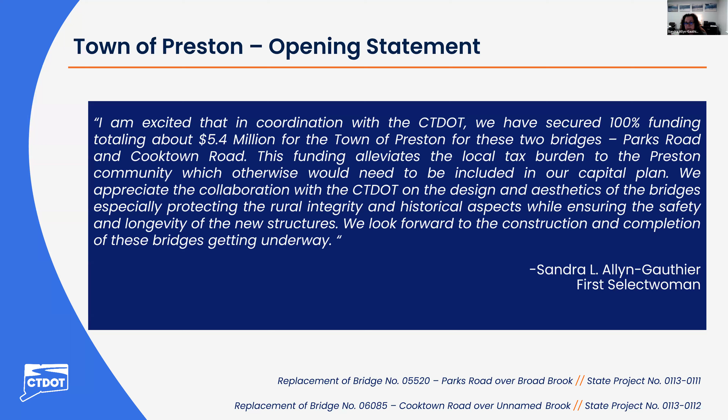Thanks, Sandra. I will now turn it over to John Carelli for the formal presentation. John? Thank you, and just thank you, Sandra, for the introduction.

Just to see if some of the town of Preston contacts, if you wanted to contact the town directly, we'll be showing multiple times throughout the presentation the different ways to contact the Connecticut Department of Transportation team for this project. So I'll get right into it.

The project purpose and need: the purpose of these projects, both 113-111 and 113-112, are to replace bridge numbers 5520 and 6085 due to their structural and functional deficiencies, in order to provide structures that are in a state of good repair and that are capable of meeting current load rating standards, as well as allow the existing clapper stone and stone masonry arch bridges beneath to remain in place.

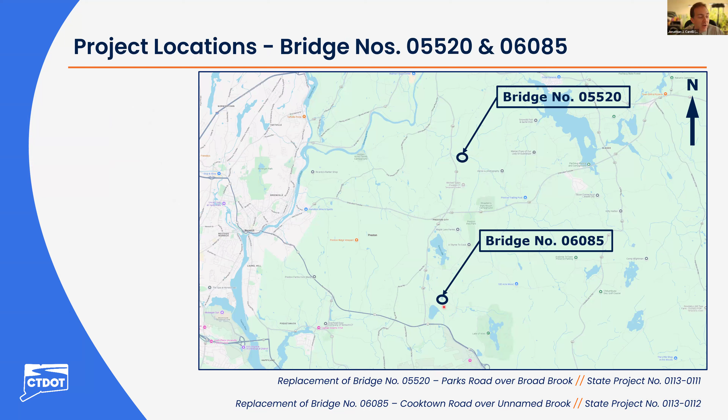Here's a slide just showing the relative location of the two bridges. Bridge 5520 is just off of Connecticut Route 164, north of the center of town, and Bridge 6085 is closer to Route 2 in the south of Preston.

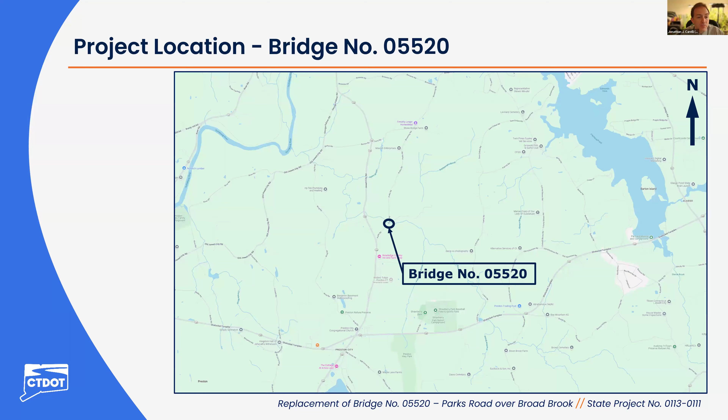Just a little bit closer view for 5520, again just right off of Connecticut Route 164. This is an aerial of the project site, as you know, on the north approach here. There's a slight horizontal curvature that joins at the bridge. Broad Brook, which it crosses, flows from the east to the west through the structure. There's one property with a driveway adjacent to the southwest corner of the bridge.

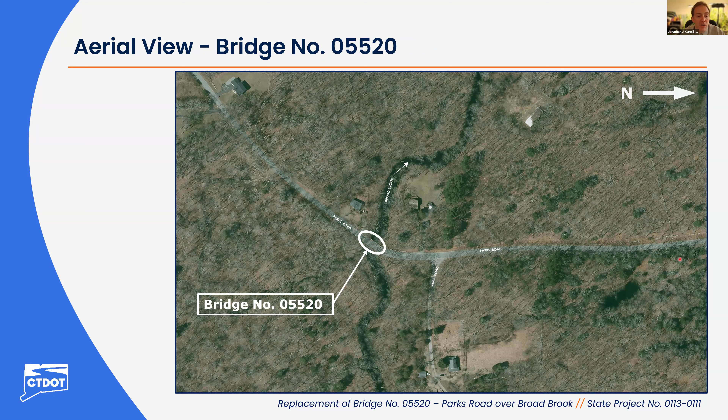Following are a couple photos showing Parks Road, again with the horizontal curvature approaching the bridge. And then here's the bridge from the north approach, again with the driveway in the southwest corner of the bridge.

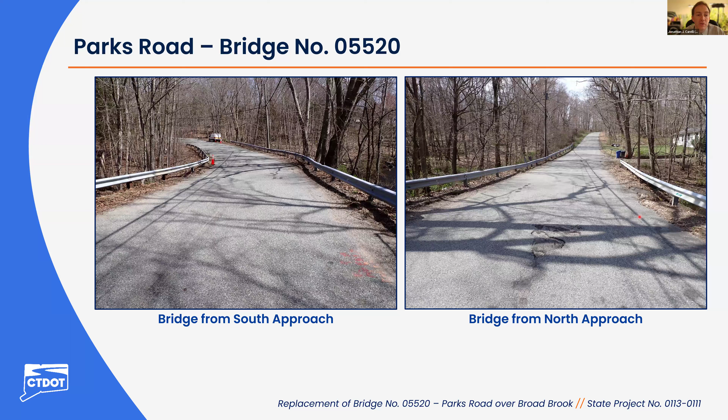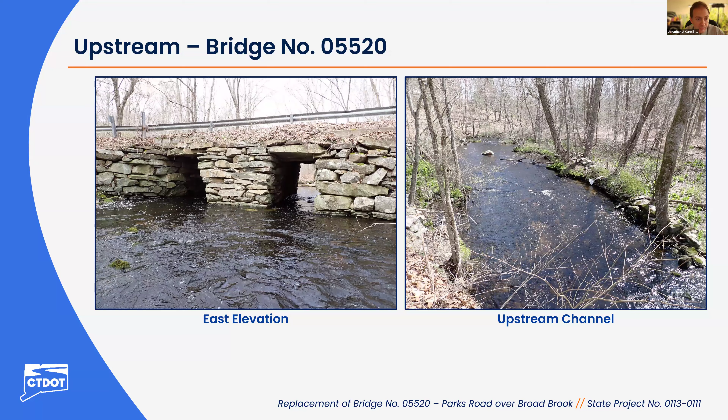Now looking at the upstream fascia, you can see the existing stone clapper bridge, the original construction of the bridge. This is the upstream channel, and it enters the structure at approximately a 45-degree angle. Downstream it exits more perpendicular to the roadway.

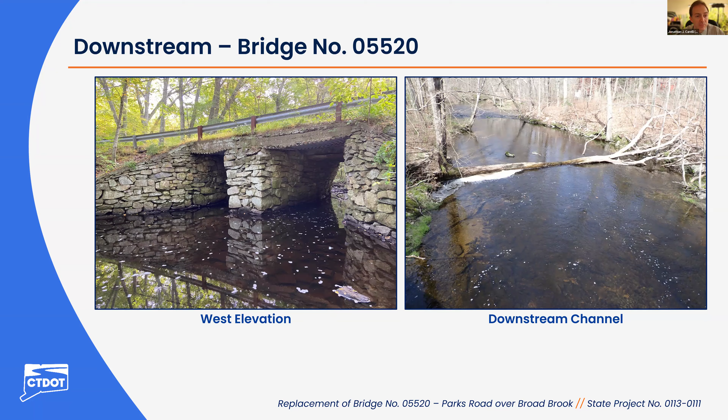Bridge 5520 was originally constructed in the year 1900, and approximately 1960 is when they added the reinforced concrete slabs. The structure is potentially eligible for the National Register of Historic Places, so that's an important aspect of what we recommend and what we're presenting here for a replacement at the site.

It currently carries a total travelway width of 21 feet with one lane of travel in each direction. A total of 148 vehicles use this crossing per day. The flow area beneath this crossing accommodates 12.1 square miles of drainage area.

The current structure is rated a 5 on a scale of 0 to 9, which in this case is fair. Some of the conditions involve heavy scale along the reinforced concrete slabs, cracks and voids throughout the stones. For the age of the structure, this is fairly normal. Loose filler stones as well—it's dry stack stone masonry, so there's naturally going to be voids between the stones.

There's slight bulging within the existing wing walls, minor scour below the water line throughout the bridge, and on the approaches, disconnected post, bent post along the roadway and for the guide rail.

The orange represents the new structure, so it would be both longer and wider than the existing just to meet standards. It's going to be longer than the existing bridge in order to set back the foundation away from any of the stone masonry that's there currently, to preserve it, and also to provide that wider structure which we need.

Again, the goal is to provide a structure that allows the existing clapper stone masonry bridge to stay in place.

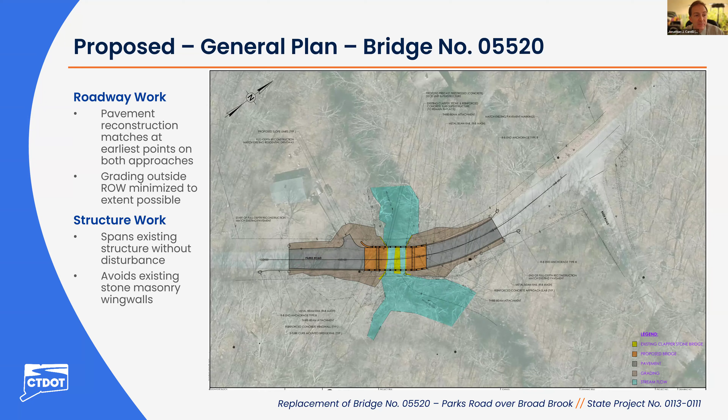We're going to have what's called reinforced concrete integral abutments, so they essentially work as one large structural unit over top of the existing structure, completely independent of what's there currently. We'll be using drilled micropiles instead of standard steel piles to minimize vibrations and again to preserve the existing structure.

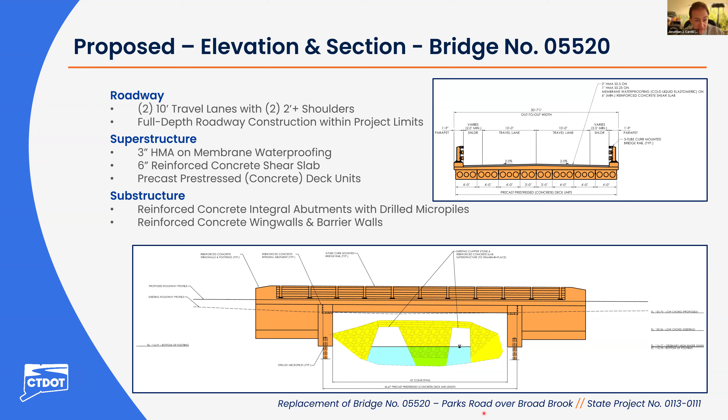I mentioned that we're going to be raising the roadway profile to accomplish this. Currently the bridge itself is actually in a low point or sag point, which is not a good condition for both drainage and the long-term preservation of the structure. For this, we're proposing again to raise and build over the existing structure, which will also allow us to move the low point off the bridge to provide better drainage away from the structure, for the long-term survivability of both the new proposed structure and the existing clapper stone bridge.

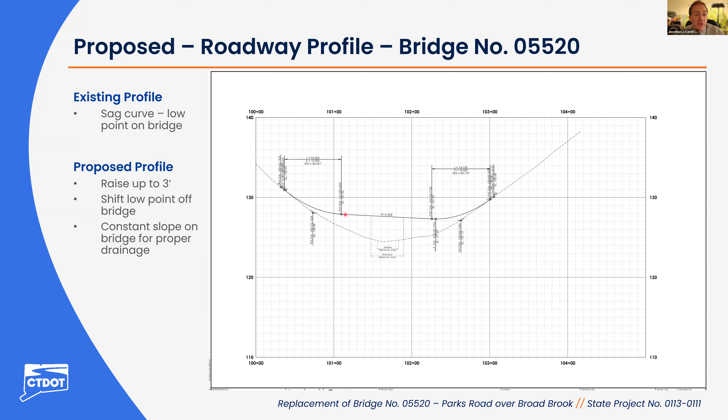Again, that provides that constant slope for the improved drainage.

To complete construction of this bridge, typically for these types of projects, so long as the contractor is proven ready and capable of doing the work, we typically allow them to close this road for the entire construction season, which begins in April and ends in late November. This allows the contractor to essentially complete all the work to get the highest quality product possible and to do it in the least amount of time.

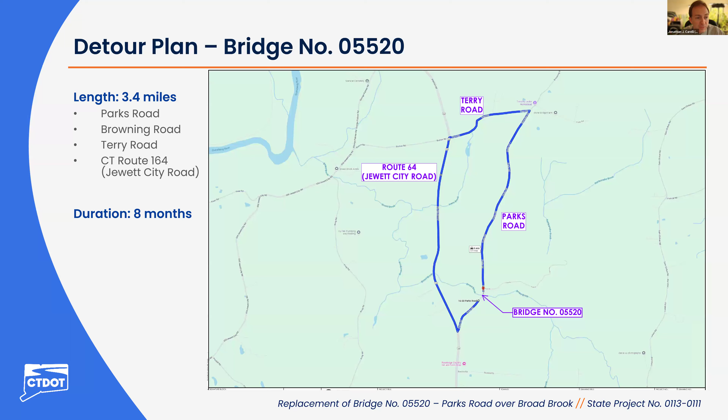So that's the first part of the presentation for State Project 113-111. I'm going to transition straight into the presentation for the second project, and then we'll be holding the Q&A session after that, just in case there's anybody who wants to see both projects and then leave.

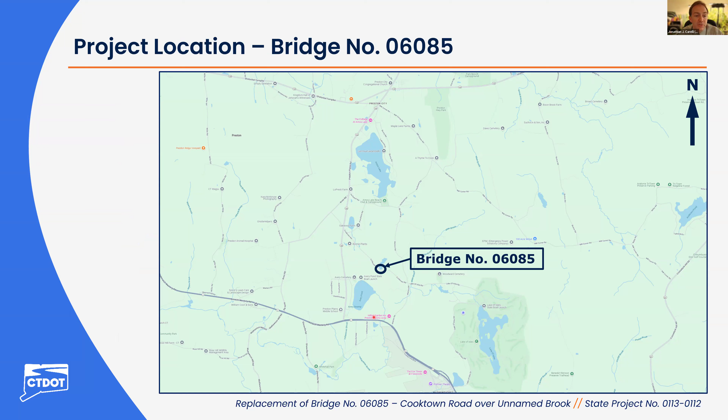It's going to be very similar to what we saw for 5520. So Bridge 6085 is further south into town, a little bit closer to Route 2, as you can see here in the center.

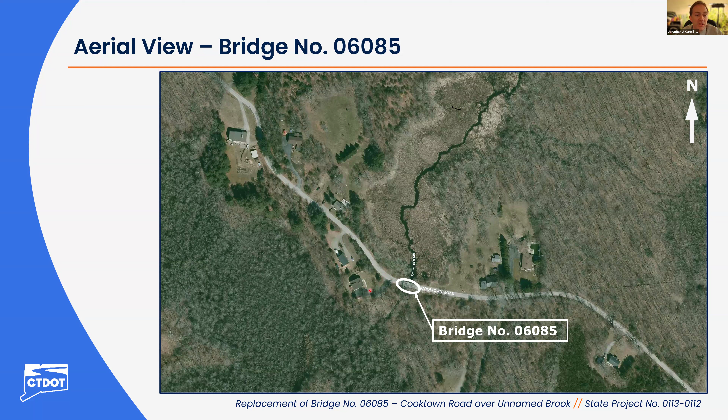With the aerial view, north in this case is up this time. There is a slight horizontal curvature as it approaches the bridge from the west. The unnamed brook flows from the north to the south. There is also a driveway entrance here in the southeast corner of the bridge this time.

On this photo, on the left is the bridge from the west approach. You'll notice there is a load posting sign here in front of the bridge currently. This load posting sign was actually revised back in October of 2024, so it has changed since then. The town has posted it. On the right here is the bridge from the east approach. In the foreground, which is the southeast corner of the bridge, there is one driveway entrance.

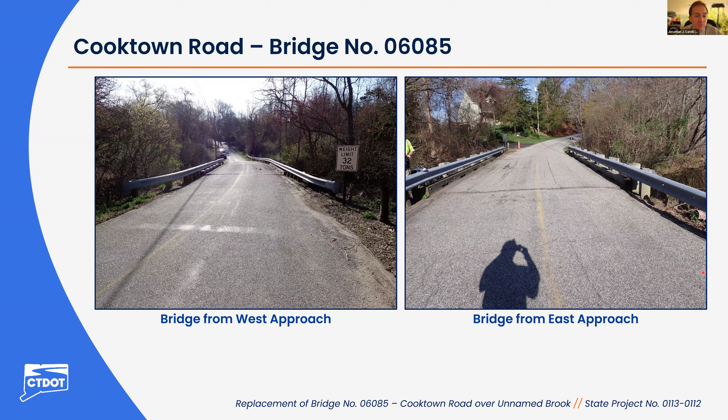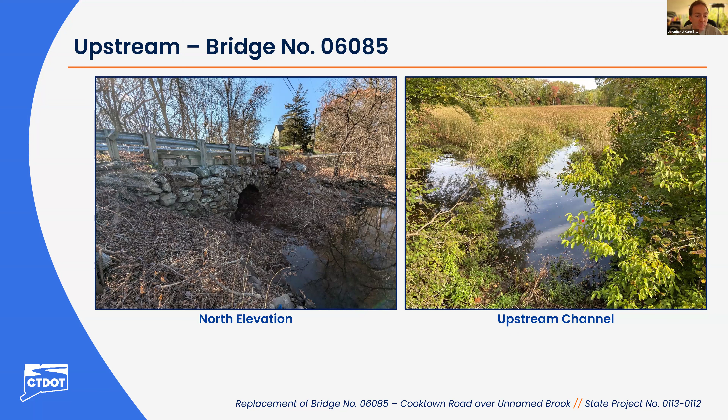Following is the north elevation. Occasionally beavers do construct a dam on the upstream face of this bridge fairly frequently, and to the right is the upstream channel. Looking downstream, you see the foundation of an old mill structure. That's the basis of a lot of how this bridge was formed and placed and why it exists originally. This is the downstream channel from the bridge itself.

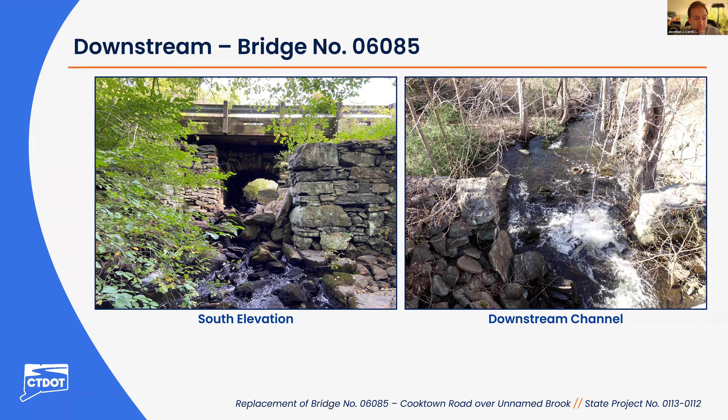Looking at the existing conditions for the structure, it was originally built in 1988, and what we say by built in 1988 was actually just this glulam timber deck structure that's over top, which essentially serves as the primary load carrying bridge for this crossing. So this is what we were looking to replace as part of this project.

The stone masonry arch underneath is also potentially eligible for the National Register of Historic Places, so preservation of it is a very important aspect of this project. The current crossing supports a travelway width of 18.2 feet with one lane in each direction and services a total of 122 vehicles per day. The drainage area for this crossing is 2.4 square miles, and as I mentioned, the load posting was revised to the following signs back in October.

Looking at the condition of the existing structure, it's very similar to 5520, at least the stone masonry portion, where you have some sloughing of stones into the channel, some voids in the filler stones, and a little bit of leaning in the wing wall. I know the majority of this happened through one of the last hurricanes that went through the state. The deck, which is the primary component being replaced, has check splits and some misalignment of the members. Once again, the metal guide rail you see on the bridge above the approaches has some broken, decayed, and disconnected posts.

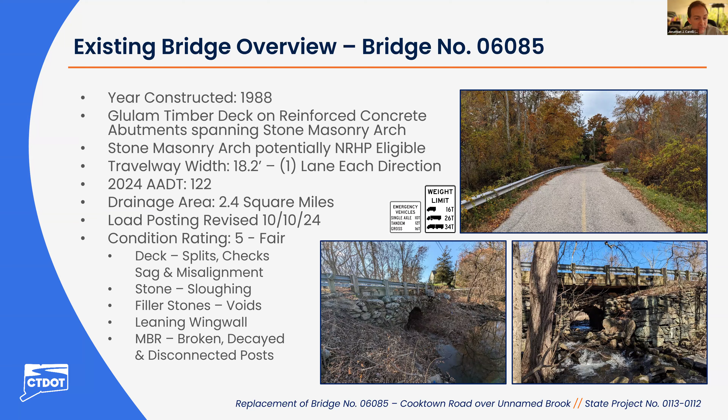Similarly with 5520, we're proposing to build a structure of almost the exact same size. You'll see the existing stone masonry structure, the abutments for it here in yellow, and the new structure here in orange to span across it, again providing a slightly wider structure just to match a standard width dictated by federal design guidelines. Once again, we will be raising the roadway to span over top the existing structure without disturbing it, which will require some grading on both sides of the roadway, represented here in brown. This will be minimized to just that necessary to support the new raised roadway. We're going for a slightly longer structure so that we can set the foundations back enough so that we don't disturb any of the existing stone masonry that's there currently.

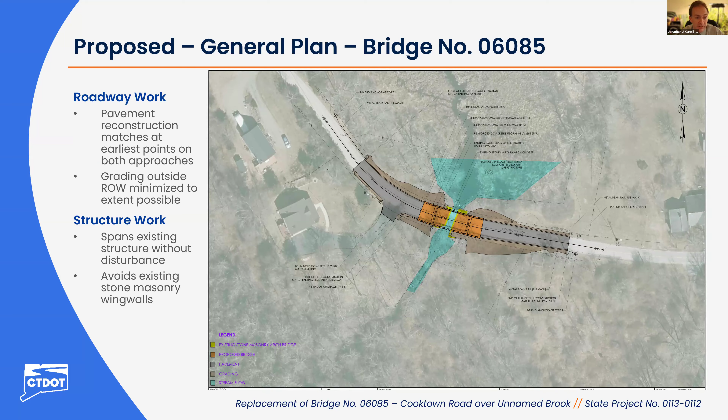Looking in elevation and section, this structure will be supporting two 9-foot lanes with two 2-foot shoulders on each side. We'll be building it over atop the existing structure, which is represented here in yellow.

One additional thing that will be done for this project is there is this existing timber structure, which you can see here at the dashed lines. That and these reinforced concrete stub abutments it's sitting on will be removed, just to remove any traces of the existing timber structure.

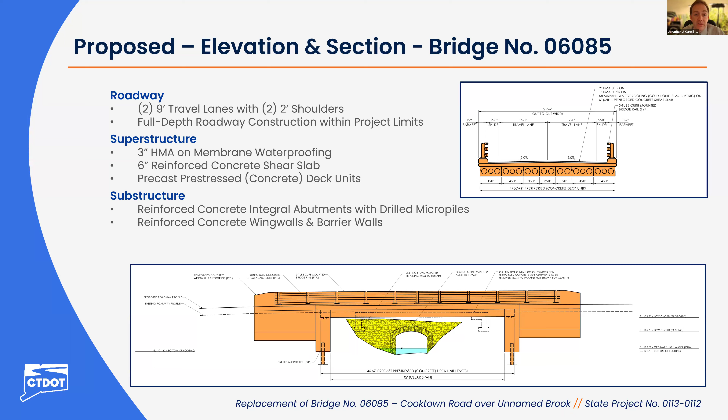Again, the integral abutments, so this works as one large structural unit to span over the existing structure, and the drilled micropiles avoid disturbance to the existing stone masonry when installing the foundation.

This is what the alterations to the roadway profile will look like. It's basically, for the most part, a vertical shift of about 2 feet. This will also allow us to eliminate a current sag point on the bridge itself, which is not optimal for drainage and for long-term health of the existing structure. By raising the roadway up about 2 feet, we're providing a constant slope across the bridge. We're able to build over the existing structure and then provide better drainage at a more optimal point off of the structure.

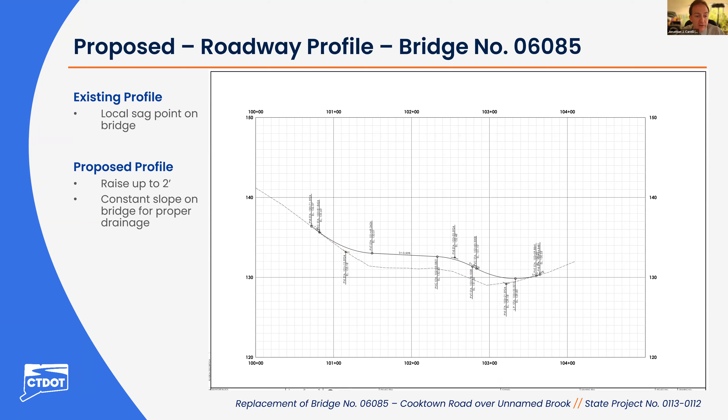Similarly, for this project, if the contractor is able to prove that they're ready to complete the work needed to replace this bridge, we would allow the contractor to close the roadway for the duration of the construction season, which again is typically 8 months.

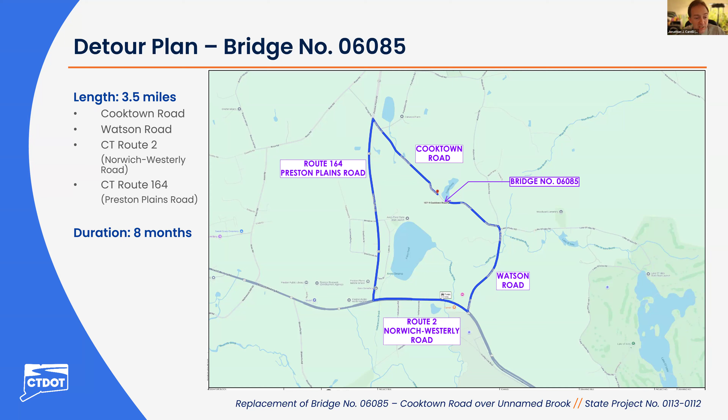Looking at utilities and environmental permits for both sites, there are aerial utilities within project limits at both sites, which will need to be either temporarily or permanently relocated during construction to allow the contractor access with cranes to install the new structural members for the site.

For environmental permits, because both of these bridges are within FEMA Flood Zone A, there will have to be a flood management certification memorandum of understanding to document what's being done at both of these sites. For other environmental permitting, all of the construction activities are taking place outside of any wetlands or ordinary high water line, so the only other thing required would be town of Preston inland wetland permits, just for the upland impacts only.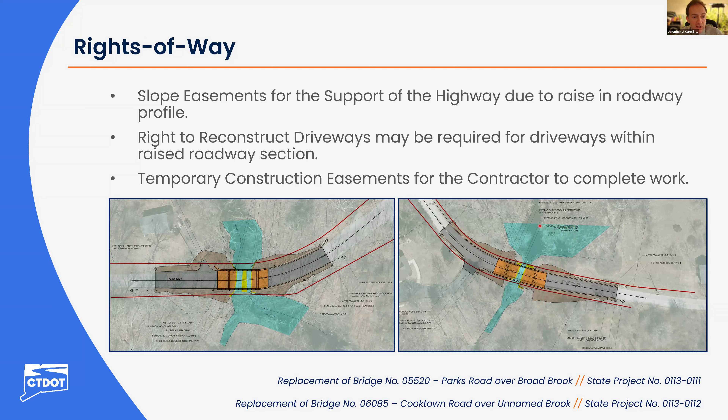Now we'll turn it over to Zachary Guarino from the Connecticut Department of Transportation Division of Rights-of-Way Office to go over the rights-of-way process in a little more detail.

Thanks, John. Again, my name is Zachary Guarino. I'm a project coordinator with the Department's Division of Rights-of-Way. Our office is responsible for acquiring the property rights needed for transportation projects. As John mentioned, this project will require the acquisition of property rights, so I'd like to give a brief overview of our acquisition process.

Before I begin, I'd like to mention that the specific impacts are still being finalized and may change as the design progresses, and that any required property rights will be acquired in accordance with Connecticut General Statute Sections 13A-73, 13A-98E, as well as the Uniform Act.

The right-of-way acquisition process begins once the design has progressed to a development milestone and all the impacts have been determined. At this point, each affected property owner will receive a formal letter of intent to acquire from our office, along with a property map which depicts the exact property rights to be acquired.

That offer will be sent out to the property owner in writing, and a right-of-way agent will be available to meet with the property owner and explain the project, go over the specific impacts to their property, and explain how the state arrived at its offer.

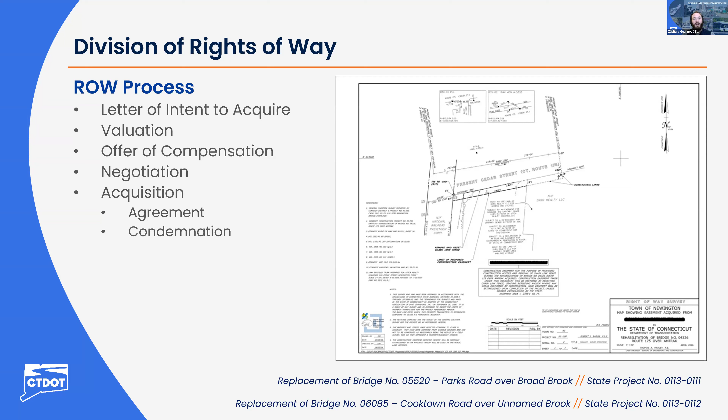Thank you, Zach. So just have one more slide to wrap up this presentation. This is the construction cost and project schedule.

The current construction cost for State Project 113-111, which is the replacement of Bridge 5520, Parks Road over Broad Brook, is currently showing $2.8 million.

For State Project 113-112, which is the replacement of Bridge 6085, Cooktown Road over Unnamed Brook, the current cost is showing $2.63 million. As for the project schedule, you'll have a current design completion date of August 12th, 2026.

With an advertising date to contractors on September 9th, 2026, an anticipated start of construction on April 1st, 2027, and to be completed by the end of that construction season on November 30th, 2027.

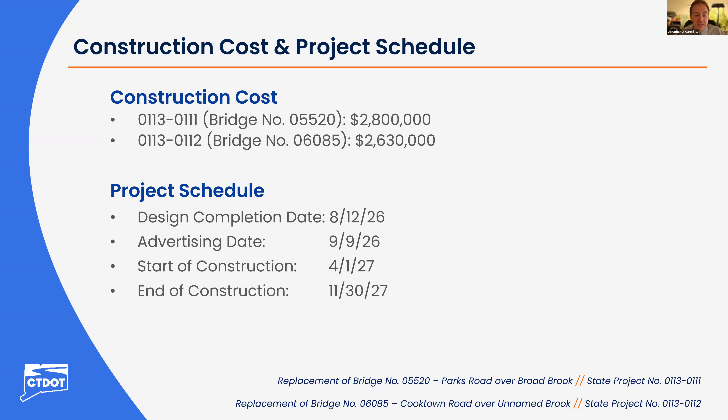And that concludes the presentation for both State Projects 113-111 and 113-112. We will be available now for a question and answer session.